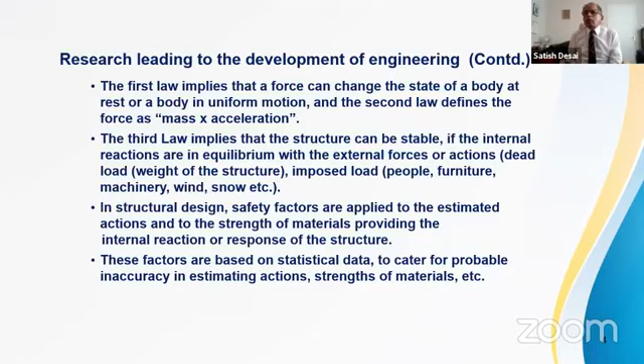In structural design, safety factors are applied to the estimated actions and to the strength of materials, providing the internal reaction or response of the structure. These factors are based on statistical data to cater for probable inaccuracy in estimating actions or estimating strength of material, etc.

Scientific revolution in the 17th century resulted in expansion in areas of mathematics, that is algebra, geometry, and calculus, and the laws of physics were formulated as a result of the work done by Sir Isaac Newton and other scientists during that time.

Engineering evolved as applied physics during the 18th century with development of engineering principles and processes with the help of scientific concepts, mainly physics, and experimental techniques.

It follows therefore that engineers can have a better grasp of engineering principles if they have a good understanding of mathematics and physics. We find in some universities the students come out of schools without enough mathematics and physics under their belt, so universities are often forced to have sort of induction courses.

During the 19th and 20th century, design methods and construction techniques advanced, especially in the field of reinforced concrete construction. The start was the invention of Portland cement in 1824 in the UK.

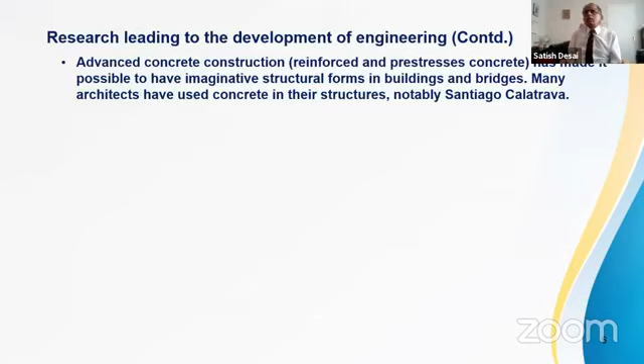Advanced concrete construction, reinforced and pre-stressed concrete, has made it possible to have imaginative structural forms in buildings and bridges. Many architects have used concrete in their structures, notably Santiago Calatrava of Spain. His structures almost seem imaginary.

This looks like a spaceship, but it is the Innovation, Science and Technology Building, Florida Polytechnic, Florida, USA. This is a twisting torso, a twisting building, residential skyscraper.

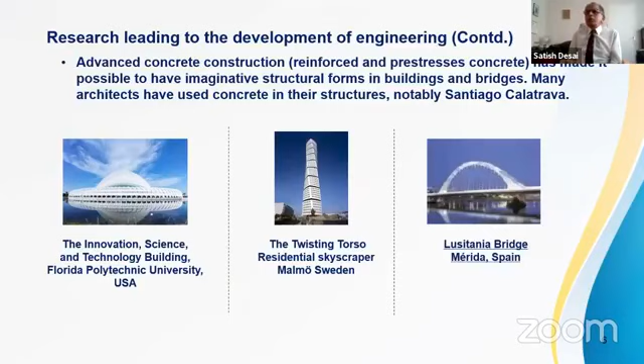In Malmö, Sweden, it has become an iconic building in the city center. Many people come to look at it. And a lovely bridge, Lusitania Bridge, Merida, Spain.

Concrete is very old indeed. First discovered in 1985, a floor in Israel, Yiftah El in southern Galilee, 9,000 years old. It was made as a conglomerate like concrete using lime as the binder.

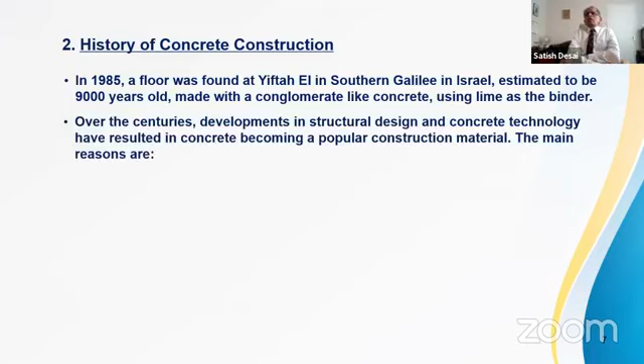Over the centuries, developments in structural design and concrete technology have resulted in concrete becoming a popular construction material. Why so?

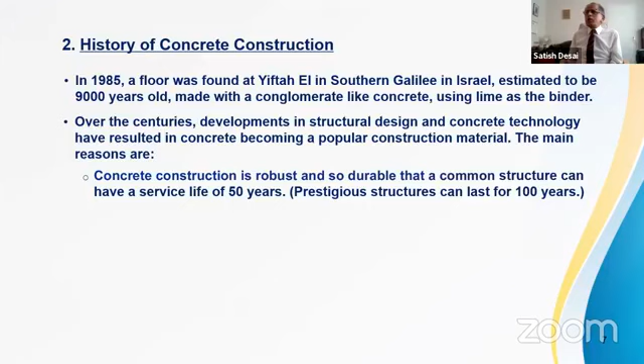Concrete construction is robust and so durable that a common structure can have a service life of 50 years or more. Prestigious structures can last for 100 years or more. Concrete floors and cladding elements have good insulating properties, that is energy conservation, and they have good fire resistance, which means that you don't need separate fire insulation. Separate fire insulation means extra cost, extra time on site that is saved.

In the UK, brickwork and timber have been exclusively used in low-rise traditional buildings. The British call everyone else non-traditional. However, steel and concrete have to be used in construction of high-rise buildings, both residential and commercial.

Sustainable concrete construction means that we are required to use natural resources in a prudent manner. A lot of thinking behind it so that we meet the needs of the current generation, that is us, without jeopardizing the needs of the future generations - our children, grandchildren, great-grandchildren.

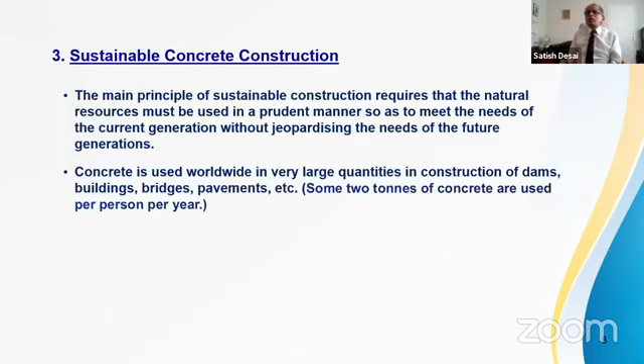Concrete is used worldwide in a very large way - construction of dams, buildings, bridges, pavements, etc. On the last count, I heard some 2 tons of concrete were used per person per year.

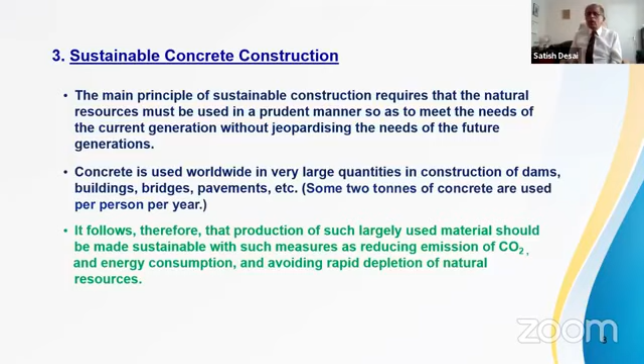It follows, therefore, that production of such a largely used material should be made sustainable, using such measures as reducing emission of carbon dioxide, reducing energy consumption, and avoiding rapid depletion of natural resources.

What is it? Portland cement, PC, is a vital constituent of concrete.

People compare it with very highly trained soldiers - they should be used for wars, defense of country, and not as traffic wardens, some people say. So, it is energy demanding.

Its production includes quarrying limestone, crushing it in stages to get clinkers, burning the clinkers at high temperature, 1500 degrees centigrade, and grinding them down after cooling to obtain a fine powder that is PC.

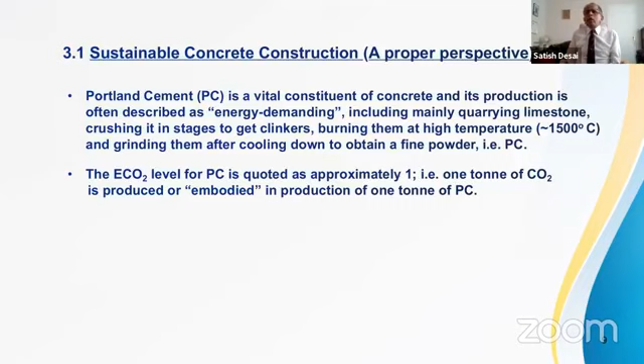The ECO2 level of PC is quoted as approximately 1 - that is 1 ton of carbon dioxide is produced or embodied in production of 1 ton of PC. In ECO2, E means embodiment of carbon dioxide.

1 cubic meter, that is 2.4 tons of concrete, can contain 700 kilogram of fine aggregate (0.5 to 5 millimeter), 1250 kilogram of coarse aggregate (20 millimeter or larger), and 300 kilogram of PC. That means contribution of PC to the ECO2 level of concrete is 0.125.

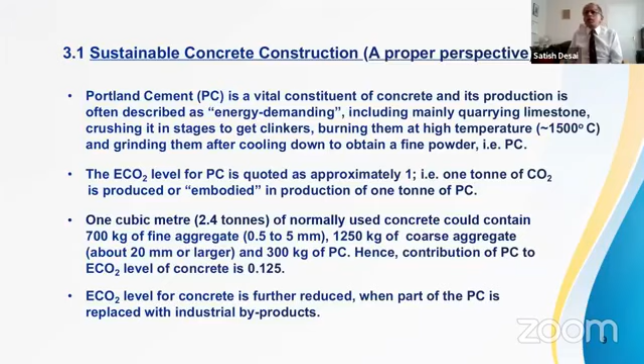This level can be further reduced when part of the PC is replaced by industrial byproducts. We'll see that in a few minutes.

Let us see what the ECO2 levels really are. Take grade 40 concrete with 30 kilogram of steel reinforcement - that is 153 kilogram per ton of concrete. Sawn softwood, 440 kilograms per ton of softwood.

Structural steel, 1.93 tons per ton of steel. But remember that recycling steel is advantageous because the recycled material has nearly the same properties as the parent material.

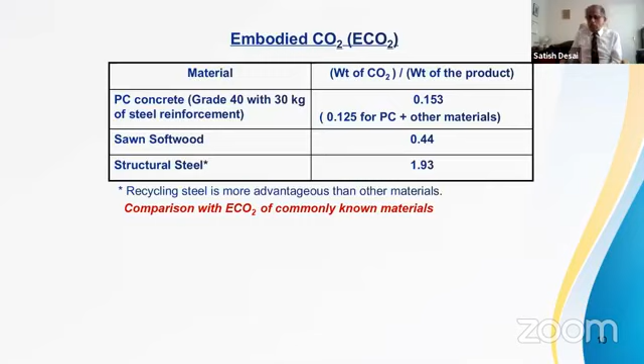Very good indeed. Let us see some ECO2 levels of commonly known materials. Wholemeal bread, 1.3 kilogram CO2 for an 800 gram loaf.

You are lucky you have puri, chapatis and parathas - I don't know what carbon dioxide they take, but we eat bread. Orange juice, we all drink it - 1.1 kilogram of carbon dioxide is required for 1 liter, that is nearly 1 kilogram.

Bag of crisps, 80 grams of carbon dioxide for 35 grams of crisps. It works out like 1.63 for bread, 1.1 for orange juice, 2.29 for a bag of crisps.

Perhaps you will remember this when you go through your next bag of crisps or number of bags of crisps. Quite energy demanding, but this information is not mine - it comes from the British newspaper, The Independent, 13th of October, 2010.

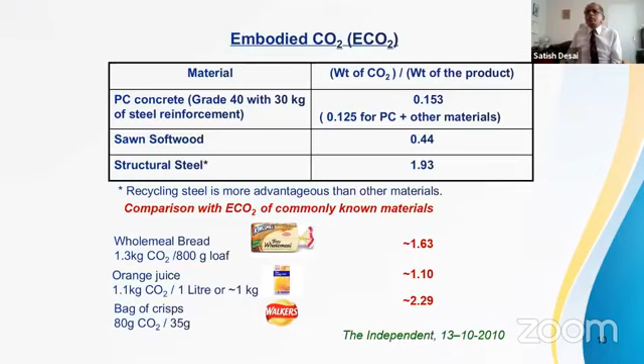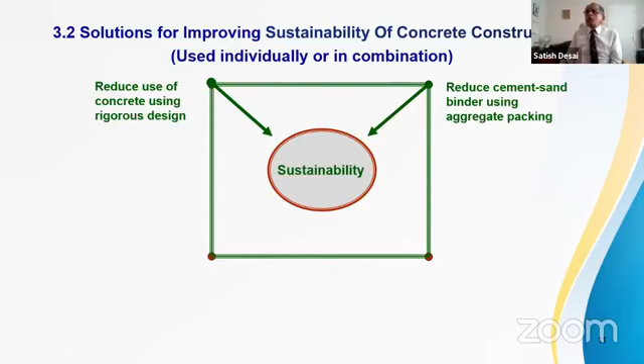Sustainability - there are measures that can be used on their own or in combination. First, you reduce the use of concrete itself by rigorous design. You could reduce cement sand binder using aggregate packing.

Most important is to make concrete durable so that you don't have to demolish the building because of faults, which is a great waste of material. Lastly, use recycled concrete aggregate.

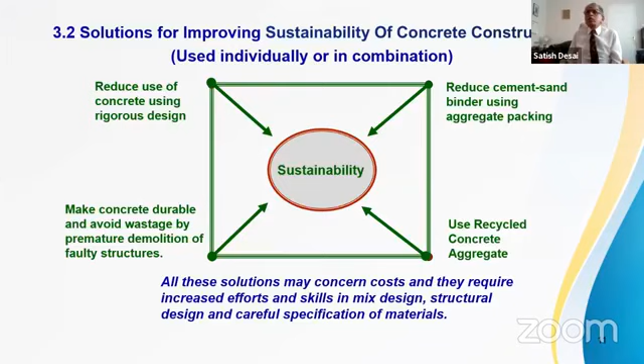My friends, all these solutions may concern costs and they require increased efforts and skills in mix design. Structural design and the specification of materials have to be very careful. May I say, therefore, my friends, sustainability doesn't come very easy, nor does it come very cheap. Optimum sizes of concrete members must be used.

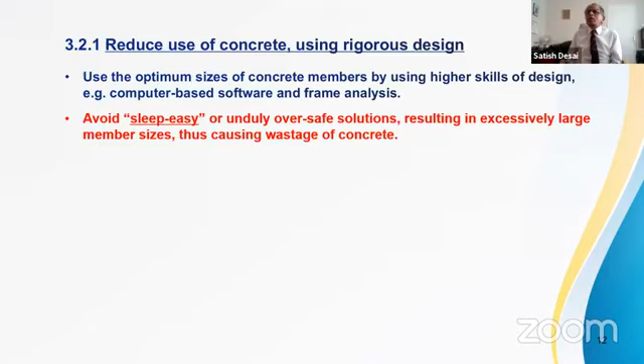Higher skills of design are required, computer-based software, frame analysis. The whole idea is not to use sleep-easy solutions, oversafe solutions, resulting in excessively large member sizes, thus causing wastage of concrete. I've known some people who will say, okay, let's put thicker beam, deeper slab, bung in more reinforcement just in case. But I don't think that is right. You must provide what is really required, having faith in your design skills. Do not over-provide.

Aggregate packing, if you look on the left-hand side, this is what happens when you don't take any care. Large voids, therefore a lot of cement and binder. But on the right-hand side is the result of grading aggregate. Aggregate packing, see, the voids are reduced, so use less cement sand binder. But the advice is, or the word of caution is, do not overdo it. If you were to overdo it, there won't be enough scope for the cement sand slurry to bind the aggregate. The phrase that is used is, please, please do not choke the mix.

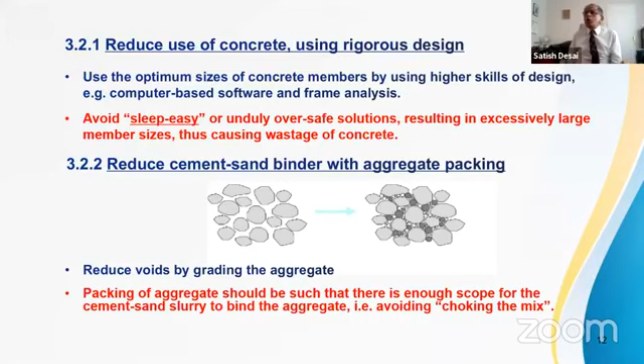Making concrete durable, durability of concrete. The first call is compact microstructure, which every concrete lover dreams have to have compact microstructure. So we have first port of call, water cement ratio.

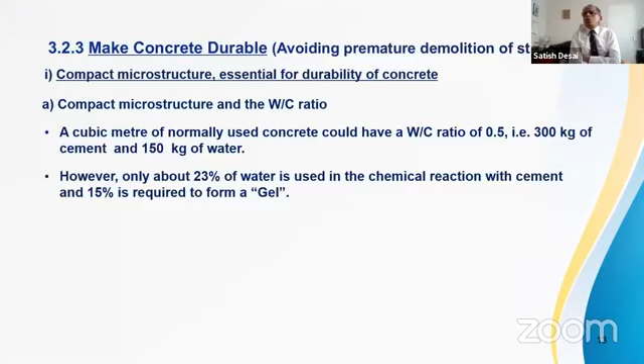A cubic meter of normally used concrete could have water cement ratio of 0.5. That is 300 kilogram of cement and 150 kilogram of water. But only 23% of the water is used in chemical reaction with cement, and 15% is required to form a gel. This gel coats fine aggregate to form mortar that binds the coarse aggregate, and you get the hardened mass we call concrete.

But the rest of the water serves only the function of making concrete flow around the reinforcement, that is, making concrete workable. But this excess water evaporates and escapes from the hardening concrete, and what you get is capillaries which allow ingress of external pollutants, carbon dioxide, chloride, sulfates, etc. Please note the spelling of sulfate here, that's how the concrete technology experts do it. In English, we spell it as SULPHATE. However, that's how things are.

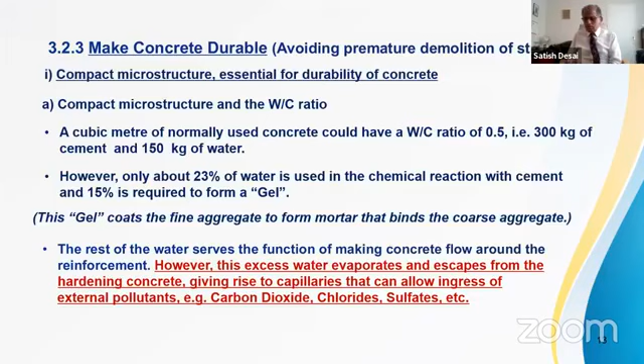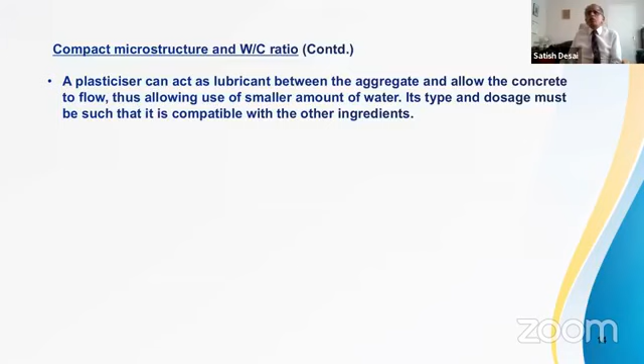You can use a plasticizer, lubricant between the aggregate, so that concrete can flow without adding lots of water to it. But you must choose the type and dosage carefully so that it's compatible with the other ingredients of concrete. Research has progressed, water cement ratio can be as less as 0.3, and you get compact microstructure, what we all dream for, lovers of concrete. Research has progressed, it can be even less, but there we are.

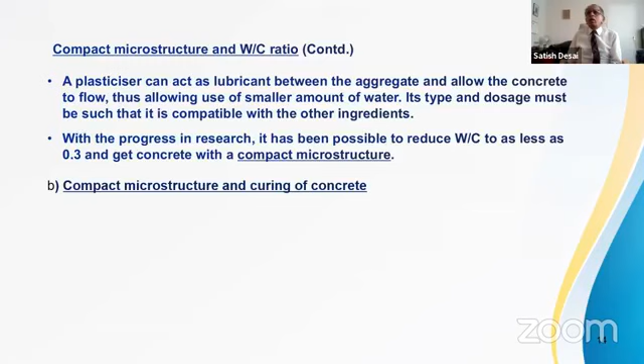Curing of concrete. Curing can prevent loss of water from hardening concrete, thus allowing continued hydration of cement. And it also mitigates thermal cracking resulting from heat of hydration of cement. What you get is improved microstructure of concrete. Please note that I use the phrase continued hydration of cement. What I mean is cement keeps hydrating after 7 days, even after 28 days, and the concrete is getting stronger. So there has to be some water left behind for this purpose.

Curing is normally done by ponding on slabs and floors or spraying walls and columns with water. One can use a curing compound applied to slabs, no need for ponding, and it can prevent loss of water by evaporation. This curing compound or aluminum film destructs itself once its job is done.

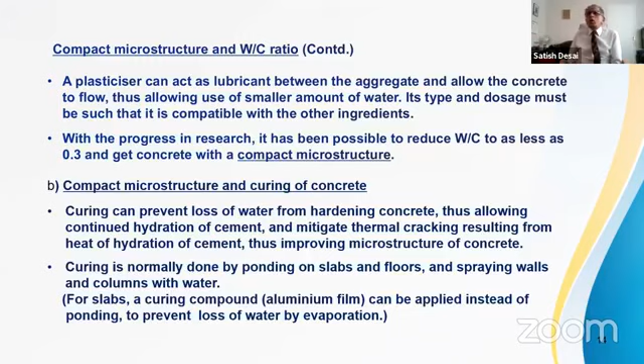Defense against carbonation, ingress of carbon dioxide through the capillaries. This dissolves in the pore water in the cement paste and forms carbonic acid, and that is bad news. Alkalinity level in concrete around the reinforcement should be pH 13, so that the steel is protected. But carbonic acid brings it down to pH 9. What happens is steel gets corroded, its effectiveness is reduced, and effectiveness of the steel reduced means premature collapse of structural element.

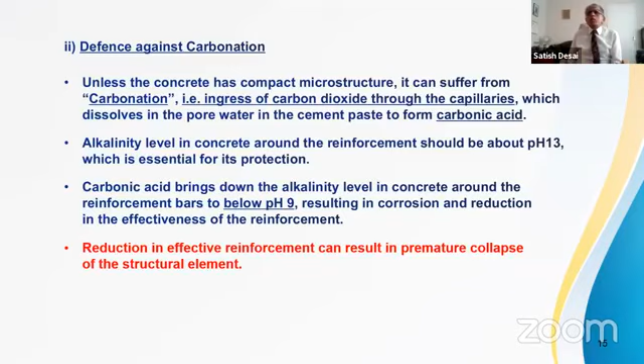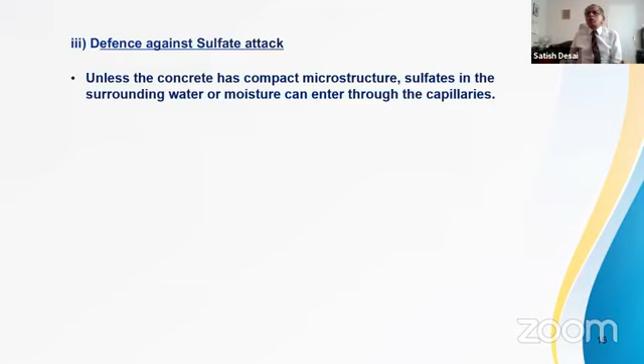Sulfate attack: if concrete doesn't have compact microstructure, the sulfates in the surrounding water, moisture can enter through the capillaries. Sulfates are found in spray of seawater or often in the underground water. So tests have to be made to make sure, but if sulfate enters, it reacts with calcium hydroxide and calcium aluminium hydrate, which are produced during hydration of cement. What happens is massive formation of ettringite and gypsum. Excessive formation of ettringite causes expansion of original volume 2.6 times, 3 times.

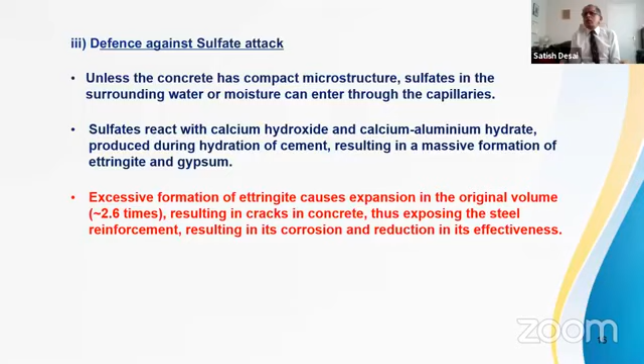Concrete cracks, the surface cracks, steel is exposed. What happens? Steel gets corroded and reduces, its effectiveness is reduced. Formation of gypsum can lead to softening the concrete and loss of its mass and strength, which can potentially weaken the structure. And in combination with reduction in effectiveness of steel, what else can happen but premature collapse?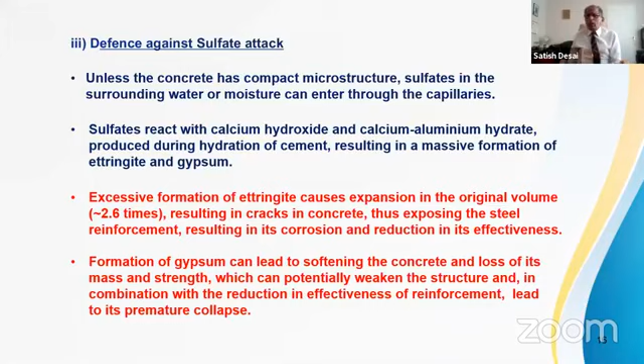There are ways of making concrete even more compact. I'll use only 2 solutions. First is pulverized fuel ash.

Pulverized coal is used as fuel in coal-fired power stations. Hot gases are produced, carrying fine particles of ash. These fine particles are collected as a fine powder, PFA. The hot gases are carried away to the power station.

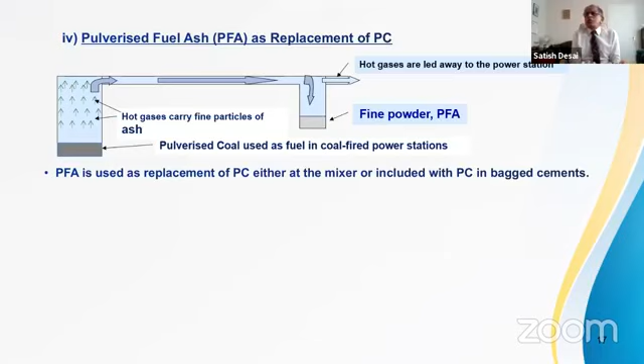PFA can replace PC either at the mixer, the way the British used to like it, but it is also included in bagged cement.

Chemicals in PFA undergo a reaction with hydration products of PC to form a cementitious binder that is better than that given by pure PC.

The formulae become more complicated, so I won't show them, but the CSH, as we call it, calcium silicate hydrate - PFA concrete has more of it due to the reaction with the products of hydration of PC.

What happens? PFA concrete has a more compact microstructure, therefore improved chloride resistance and enhanced durability.

However, such a two-step chemical reaction - first the hydration of cement, then the products react with PFA - means the cementitious binder forms a bit later.

Therefore, strength development is delayed. People say PFA concrete should be tested at 56 days, but this delay doesn't go down well with speedy contractors who want rapid use of formwork.

Also, precasters don't like it because they have to make maximum use of the formwork. So speed is not there, although there are good qualities of PFA concrete.

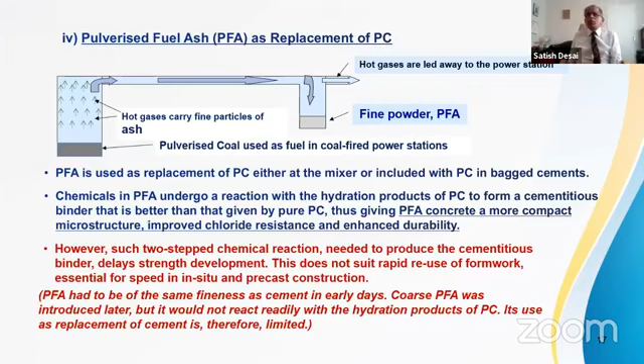coarse particles - the reaction is not readily there with hydration products of PC. Therefore its use as a replacement of cement is somewhat limited.

This is how it happens. Coefficient of chloride diffusion is on the left hand y-axis. The x-axis shows PFA replacement level.

The red line is dropping up to a point, which means that the concrete is getting more chloride resistant. Chloride resistance is improved up to a point.

On the right-hand axis is compressive strength of concrete in newtons per millimeter square, which drops a little, but a happy compromise is reached when PFA replacement level is 35%, giving good chloride resistance and reasonable compressive strength.

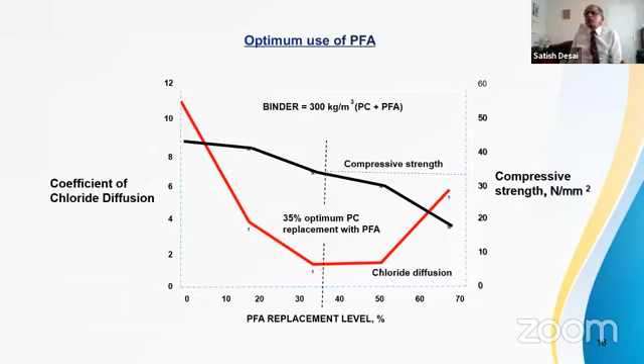Ground granulated blast furnace slag, quite a mouthful, so we just call it GGBS. It can be used either at the mixer, which the British also like, but more popularly it is used as a bagged cement product.

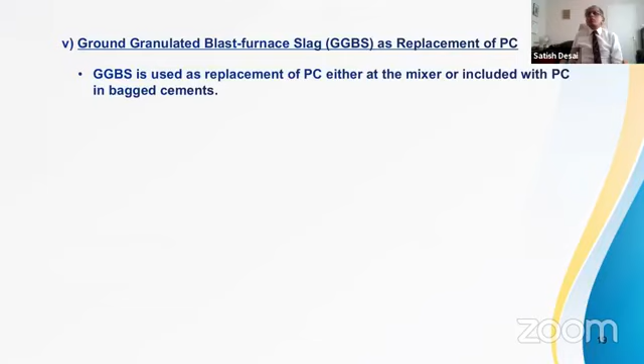There is my little furnace on the right-hand side where a controlled mixture of iron ore, coke and limestone are introduced and heated at a temperature of 1500 degrees Celsius.

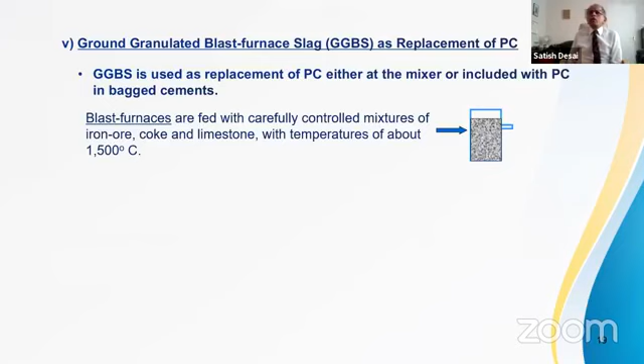Quite comparable to what was used to make cement. The iron ore becomes iron and settles down.

High temperatures result in a molten liquid, or slag, which rises to the top and is tapped away in a very clever and very efficient way - a special technique.

This slag is rapidly quenched in large volumes of water. This optimizes the cementitious properties of GGBS and produces granules similar to coarse sand particles.

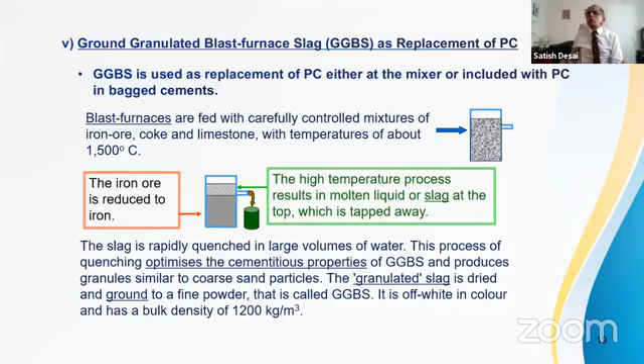This granulated slag is dried and ground to a fine powder called GGBS. It is off-white in color and weighs 1200 kilograms per cubic meter. You can see why it is called ground granulated blast furnace slag, GGBS for us.

Burning limestone and other ingredients gives inherent cementitious qualities to GGBS. We are making use of most of the energy that would have been used to make iron, but GGBS is the byproduct.

In commonly used concrete of 25 newtons per millimeter square, blended cement with 60% GGBS gives us a reduction in energy consumption of 43%, and a reduction in carbon dioxide emissions of about 50%.

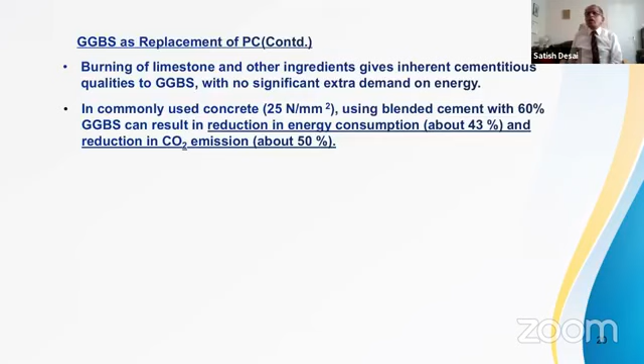Good figures, I'll say, but the mixture of water and GGBS is harmful to the skin, so the operatives have to take care and use protective gloves, etc.

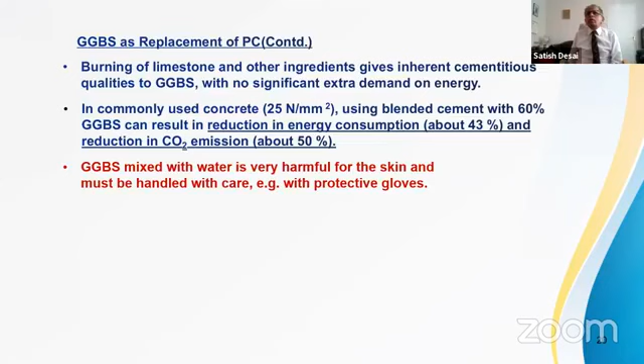GGBS concrete develops early strength, but in our country, the University of Sheffield has produced research which says a minimum of 6 days of water curing is required for long-term strength development.

Without any water curing, the 91-day strength can be only 70% of expected strength.

I tried to point out that while both PFA and GGBS are good, you must remember some drawbacks, some essential things: extra time for PFA concrete and the need for water curing in GGBS concrete. But curing is commonly done for bridge construction.

Bridges in cold countries like the UK require de-icing salt, very strong chemicals, so GGBS concrete can protect the bridge. But building contractors are not very keen - they say, we are not paid for it, so we won't do it.

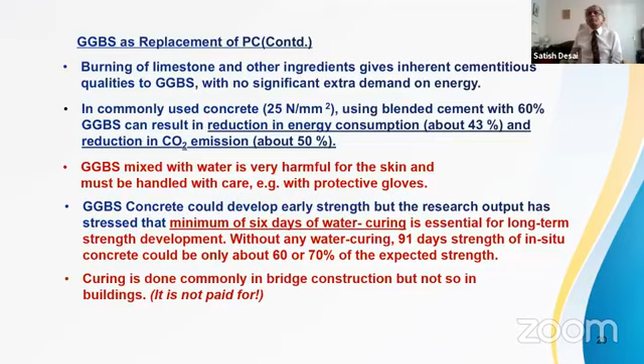Recycled concrete aggregate, RCA, has a twofold advantage. First, we don't need so many holes in the ground to get natural aggregate.

Secondly, fewer holes in the ground are needed for disposal of products of demolition - less landfill sites. In the UK and other countries, these holes often end up in places of natural beauty, so the environmental people don't like many holes.

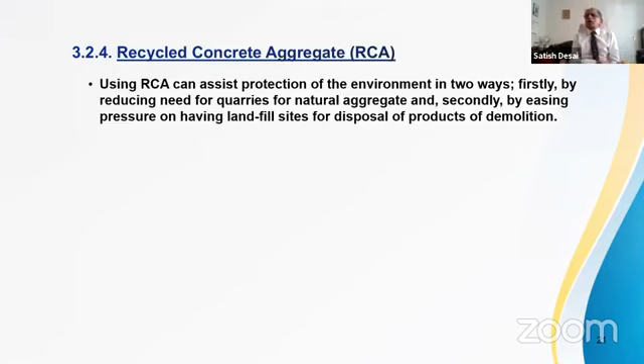Systematic cleaning, screening, and testing of RCA are required so that we get rid of impurities such as gypsum and excessive proportion of dust and fine aggregate. But the cost of such operations has been considered too high in the UK. Maybe increased tax on the products of demolition might improve the situation.

My friends in Holland have shown me that their contractors have a very systematic, highly professional process: break the concrete down, grade it, screen it, clean it, so they get better quality RCA. People say they don't have many natural aggregate quarries, so they have to use it, but they are indeed doing great service to the environment.

However good the cleaning may be, RCA will have some mortar attached to it, which is hygroscopic and absorbs excessive water, reducing the water available to make the concrete flow. We call RCA mixture a harsh mixture, very harsh.

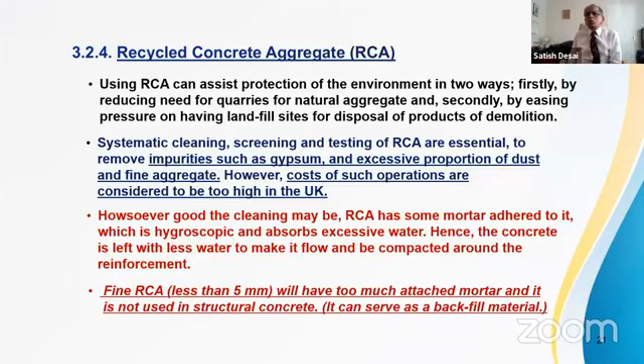There's a problem getting the concrete to flow around the reinforcement and grip it. Fine RCA is worse - less than 5 millimeters - it has too much attached mortar and is not used in structural concrete, only as backfill material.

About 30% of coarse RCA, around 20 millimeters, can be used in low performance applications like pavements, internal slabs, and internal members. But RCA has to be chemically inert. The parent concrete may have chlorides, sulfates, etc., and we don't want to bring them into the RCA.

People add extra water to make the concrete flow, and then extra cement to maintain the water-cement ratio to get the desired strength. This, I think, jeopardizes the principles of sustainable construction. On one hand you are using a recycled product, on the other hand you give it away by using energy-demanding cement.

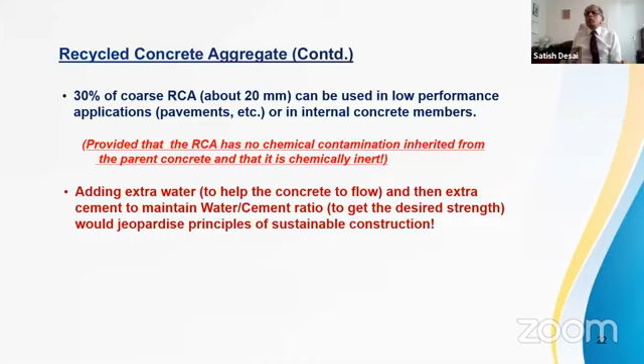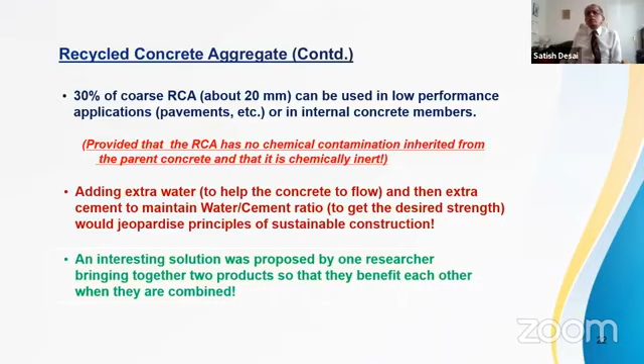An interesting solution was proposed by researchers to bring two products together so that they can benefit each other when combined - a beneficial combination of two materials, successful matchmaking. Someone like me of Indian origin, matchmaking is good.

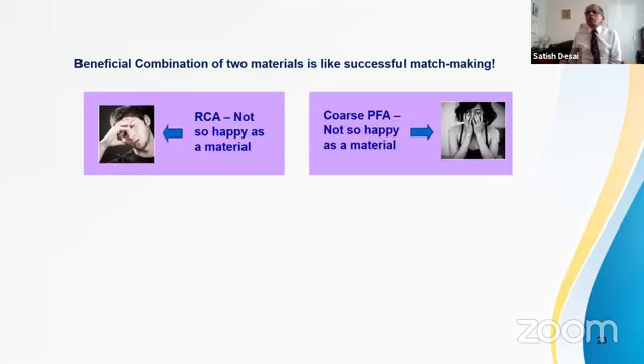RCA on its own is not so happy. Coarse PFA alone is not happy either. But make RCA concrete with a binder using coarse PFA, and they say it flows better. Happy together - good engineering practice.

First is construction: you have to use the right cement or water-cement ratio. Concrete has to have the desired strength and compact microstructure, achieved through compaction of concrete and avoiding segregation during placing.

Segregation means separation of coarse aggregate. If the cement-sand binder separates from the coarse aggregate, it results in weak layers of concrete.

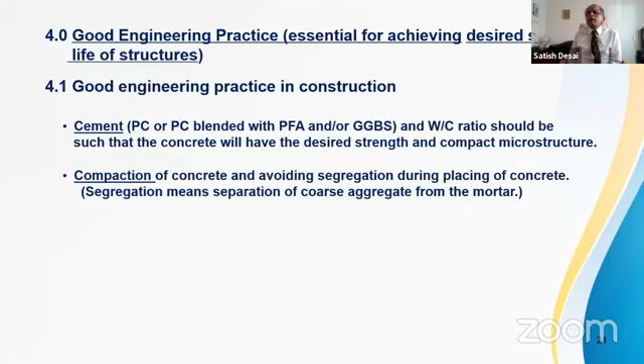Curing of concrete after placing is needed to avoid formation of capillaries due to evaporation of water, and thermal cracking due to the heat of hydration.

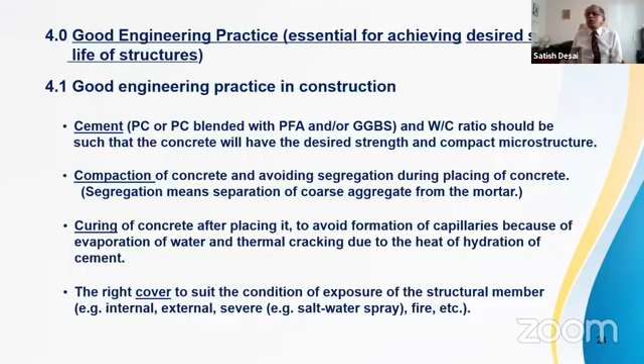You should provide the right cover to suit the exposure condition of the structural member. Internal members need modest cover, external members moderate cover, but there are severe conditions like salt water spray and fire exposure. Guidance is available on how strong the concrete should be, how big and thick the member should be, and how much cover should be provided for each severe condition.

Structural design, specification of materials, and work at the construction site should be entrusted to trained and experienced personnel with good judgment developed through education, training, and sound experience gained under the right supervision.

For example, detailing should ensure that reinforcement is not so congested that it would inhibit compaction of concrete. I've known detailers and designers who put so much steel there's no room for the concrete to go around - and most importantly, bond with the reinforcement is not proper. So do not congest the reinforcement.

Normally experience is counted in number of years - 5 years, 10 years - which is misleading. A young engineer working in a firm, guided by an opinionated senior man, would be doing only routine design: what was good yesterday is good today.

If a new problem comes, he'll have a problem - he won't solve it, no lateral thinking. He may be using what was close to the worked examples he had crammed for passing exams. But many firms may not wish to provide any structured training for graduate engineers - that's a big problem.

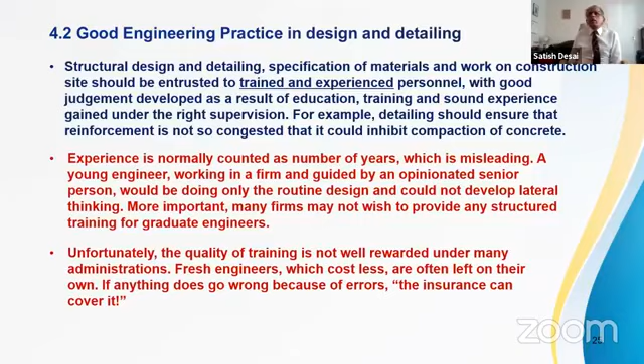On the top, there are high-profile engineers, understanding professional and environmental responsibilities, the need for training, staff structure, etc. But there are not-so-good firms owned by financiers. They know only profit, and ignore engineers' responsibility, training needs, staff structure, etc. Not so good.

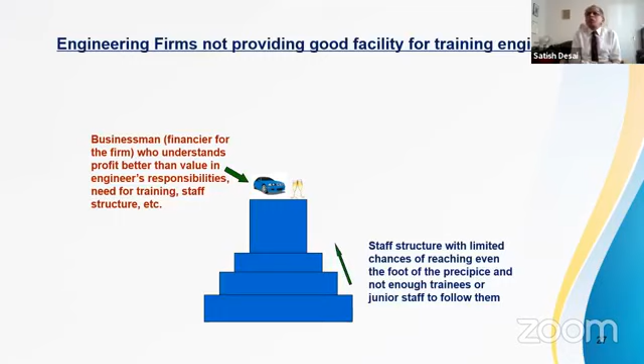This sort of structure has got only a few steps. Very few people can go to the top. At the top sits our financier who says, 'Please do routine design, quick, quick, quick. Quick invoicing, I don't want my cash flow bothered. Cash flow is important. Training, checking' - not so polite words, I won't say them. 'Sustainable construction, I can't afford it at present.' But you probably think he didn't want to do it anyway.

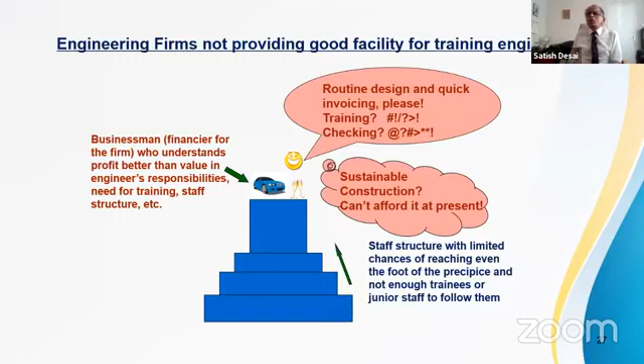What can happen if good engineering practice is not there? Collapse, premature collapse. Ferrybridge Cooling Towers, West Yorkshire, United Kingdom.

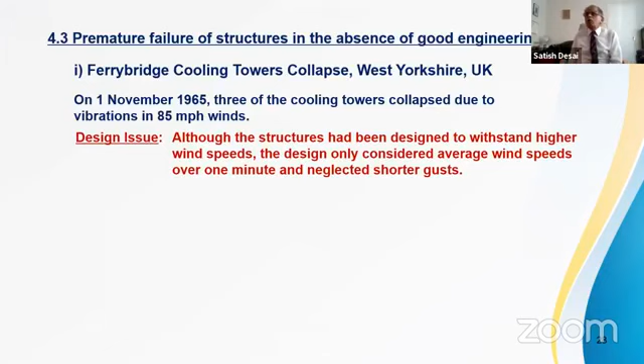On 1st November 1965, three of the cooling towers collapsed due to vibrations in 85 miles per hour winds. But the wind speeds quoted were only average wind speeds over one minute, and the shorter gusts were ignored. So three of the eight cooling towers were destroyed.

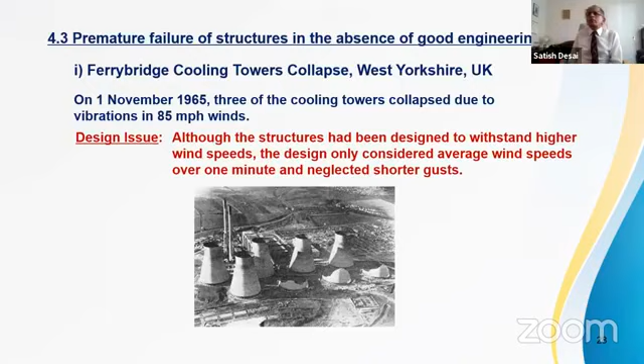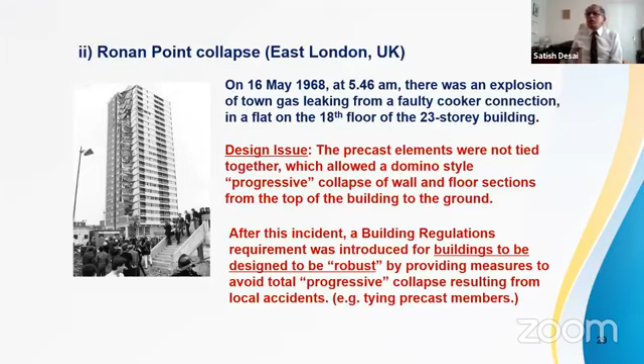Many complex solutions exist, but there is a feature in it which requires tying of precast members.

Pipers Row multi-story car park, Wolverhampton, United Kingdom, was built in 1965. A 120-tonne section of the top floor collapsed during the night of 20 March 1997.

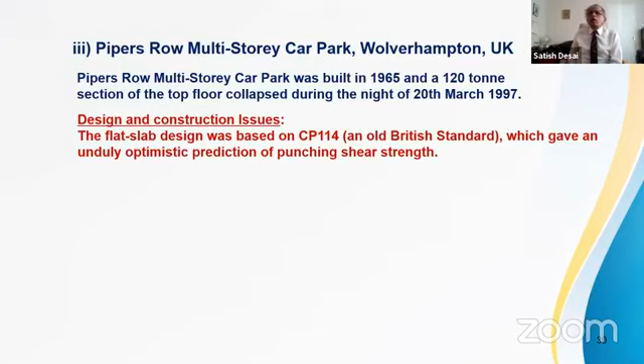There were design and construction issues. The flat slab design was based on CP114, an old code, which gave an unduly optimistic prediction of punching shear strength. Punching shear is an issue with flat slabs - there are no beams, so load from the slab goes straight to the column. If the slab is not designed properly, if the concrete is not strong enough, the slab is not thick enough, or there is no reinforcement in the form of links, the design against punching shear strength is not sufficient.

Failure occurs along the notional surface of a cone. Metaphorically speaking, we call it the column punching through the slab.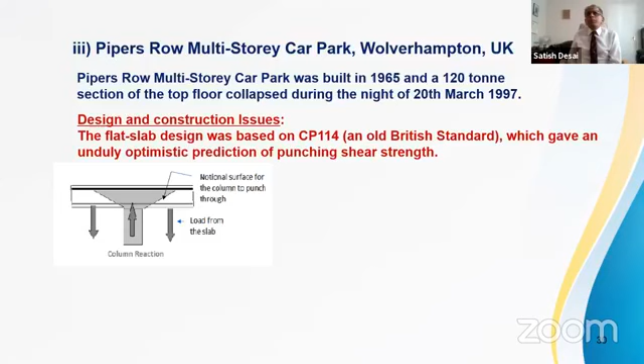To add to the problem, some concrete had low cement content, poor mixing and compaction. Thus, localized areas of concrete were well below the specified 20.5 Newton per millimeter square strength. Punching shear strength was reduced, and the connection between the slab and the column was weak.

Designers realized that there are three members in the design: number one, the slab; number two, the column; but a third is the connection between the two - the column-slab connection, which is very important. This poor column-slab connection became weaker as time went by, and corrosion set in.

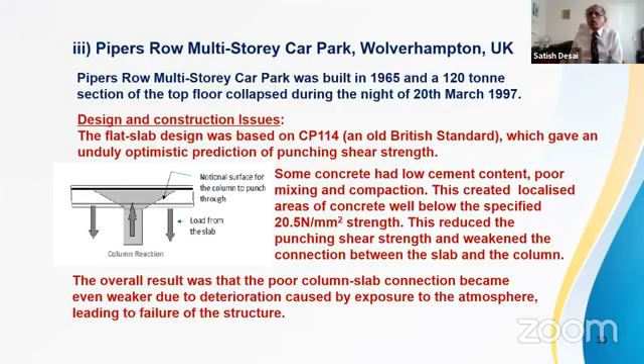What can happen? It fell down. This is how it seems to have happened. I pointed with a red arrow to the culprit, the column that punched through the slab.

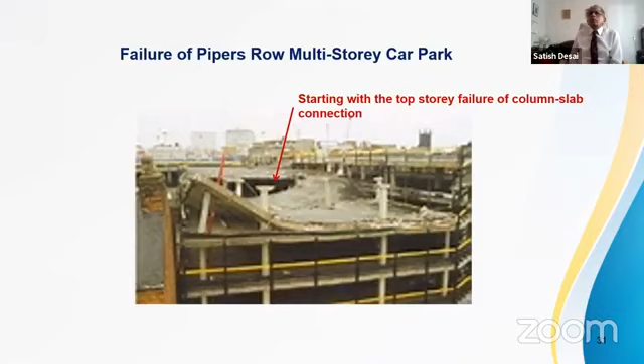If I may conclude, research and development in concrete construction has benefited concrete - higher strength, compact microstructure, realizing the dream of all concrete people. Durability is improved, sustainability is improved, but some research could be sponsored with strings attached, and the outputs must be examined carefully before using them for designing and constructing safe and durable structures, of course with due attention to the principles of sustainable construction.

Industry-sponsored research may have hidden uncertainties and may make unjustifiable claims. This point is well made in the book The Constant Gardener by John Le Carre, a very famous writer, in the context of pharmaceutical product research, but it applies quite well to our cause here. Page 278, I think, says: uncertainties inherent in any research project often receive inadequate emphasis. One could go a bit further and say uncertainties are often hidden. So engineers must pick them up and take the research output for what it's really worth.

There is always a risk of authors being persuaded towards a greater emphasis on positive findings than is really justified. They pay their money, so they expect some promotion of their product. I have known that samples with industrial products are made with great care. Plasticizers are used, aggregates are packed, and the PC specimens are not made with that care. Unfair comparison, I'll say, but those who pay their money expect something.

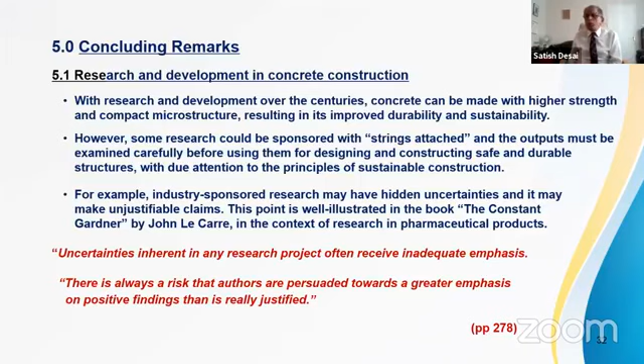I have gone to our scripture, the popular one, the Bhagavad Gita. Lord Sri Krishna defines what a Vakyam should be. Vakyam means message. I have adopted for our purposes: a good research output should be meaningful, sartham, with substance, not shallow, tathyam, beneficial, hitam, agreeable, priyam, appropriate, yuktam, conclusive, anuttaram, which means the conclusions must be clear, must be transparent, and the reader mustn't be left hanging in the air. In Hindi, there is a nice word for anuttaram, direct translation, lajawab. Sartham, tathyam, hitam, vakyam, priyam, yuktam, anuttaram.

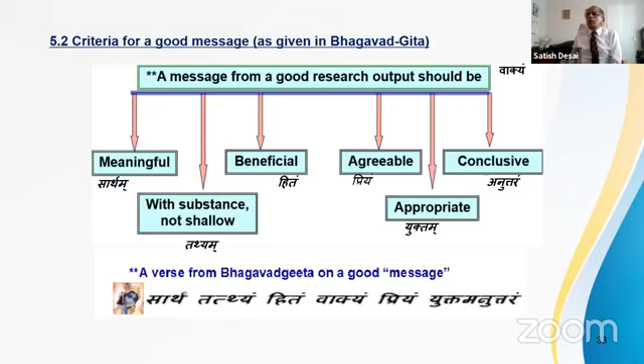Yuktam, appropriate. Anuttaram, conclusive, lajawab. During my time, I met some people with questionable research reports. Really, they are gems.

Recycled aggregate can be as good as natural aggregate. Oh, really? You will say, no problem. Oh, yes. A presentable young lady said microscopy analysis of aggregate recovered from demolition of riverside buildings in Italy showed that the RCA was very similar to the popular gravel aggregate extracted from the river. What are you worried about, she said. Very similar.

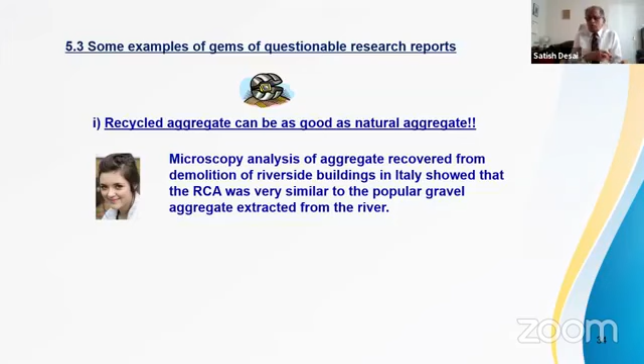I am a cynic, so I asked her, come on, Miss. Is there any real surprise? Builders must have taken the aggregate from the river to build the riverside building. Where else would they go? They built the concrete building, you pulled it down, you broke the aggregate. Now you find the recycled RCA is similar to the river aggregate. Logical it is, without such hard work, but however...

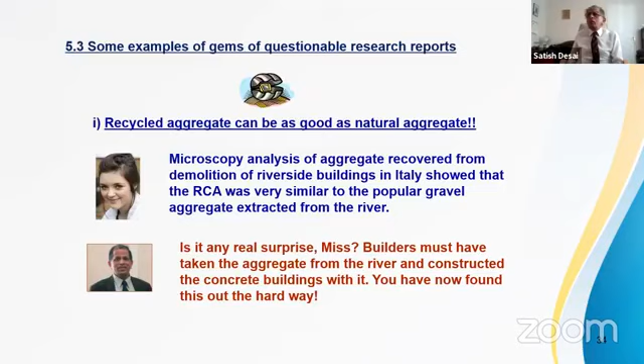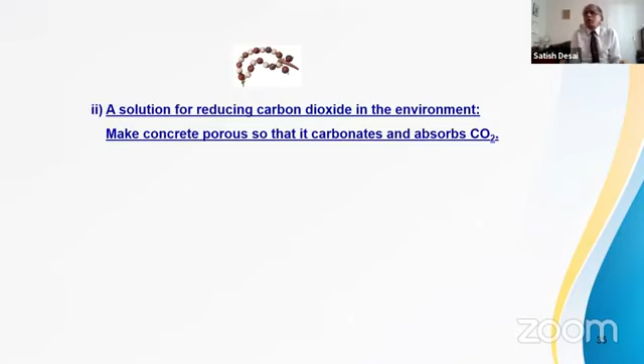Solution for reducing carbon dioxide in the environment: make concrete porous so that it carbonates and absorbs carbon dioxide. How much we don't know, but the principle is there.

One of the delegates said, make concrete porous and it will corrode my steel reinforcement and my structure will fail. Then we all went and read the small print. They say, oh, the man said, you should use stainless steel reinforcement. Oh, really? Stainless steel reinforcement costs a lot. But the man said with a straight face, no worries, you must protect the environment. The question is, at what cost? Too expensive?

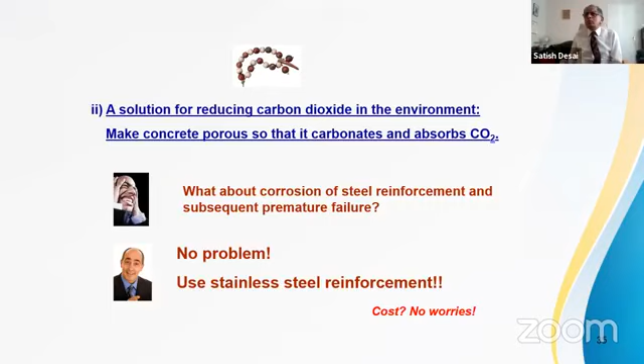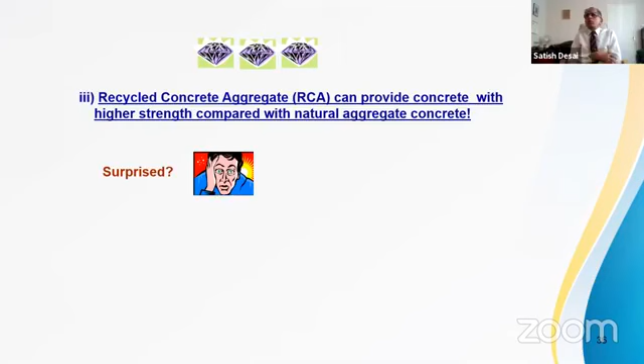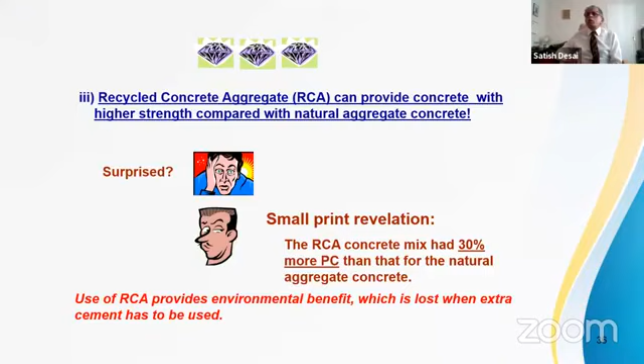Recycled concrete aggregate can provide concrete with higher strength compared with natural aggregate concrete. Oh, really? No problem. Surprised all of us were. But we read the small print: the RCA concrete mix used 30% more PC. The specimens were made with all the goodies, packing and plasticizer, etc. Natural aggregate concrete, PC, versus 30% more PC. RCA used for environmental benefit, lost with use of extra cement, energy demanding, expensive, etc., etc. Not a good practice. The report has to be read carefully to find this.

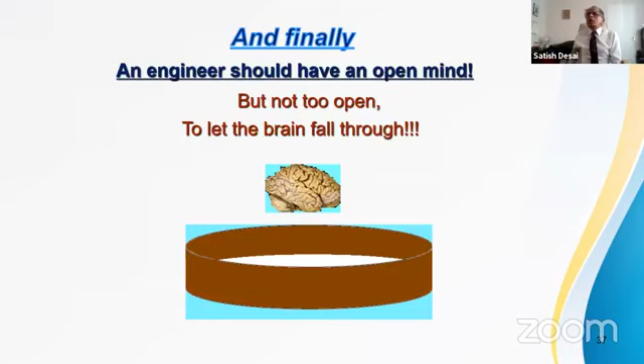And finally, my friend, I want to leave you with a message. It has been very dear to my mind. An engineer should have an open mind, of course design and build safe and durable structures, of course pay attention to the environment, no doubt at all. But his mind should not be too open, not too careless. The mind should not be too open to let the brain fall through. That's my message coming from an engineer. Thank you very much for your attention. Thank you, bye for now.

Thank you very much, Dr. Desai. [sound issue noted]. Dr. Desai, thank you very much. Oh, you're welcome. Yes, any questions?

Satish Dupeli has said that the lecture was very good, but apart from that, are there any questions? Oh, excellent presentation, Dr. Desai, excellent presentation, true to the heart and to the truthfulness.

Highly appreciate, thank you. Desai, are you classmate of Professor Desai? You pardon? Are you classmate of Professor Desai? It's some problem with sound. You were studying together? No, we are not studying together.